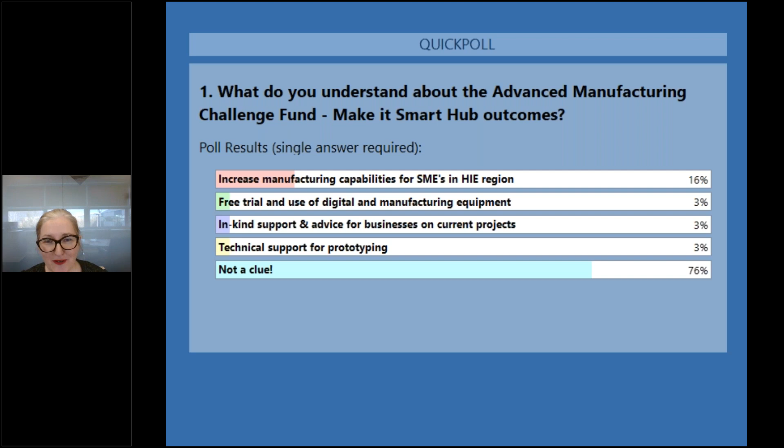Thank you, Sarah. Welcome all, and particularly welcome those joining us from the Highlands and Islands Architectural Association, who we've co-advertised this event with. This is the first time we've done a lunchtime webinar in conjunction with that partner, so hopefully you'll get something from this.

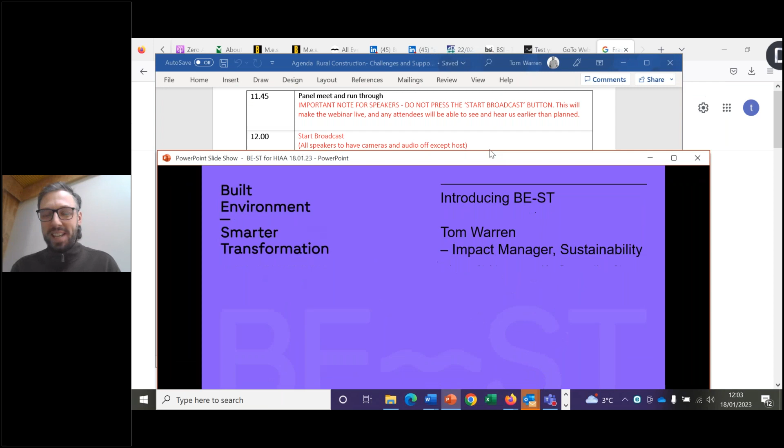I'm just going to share my screen. Sorry, I'm just having a slight problem with that. That's it coming up now for us. Thank you. Can you make it full screen please? Thank you. Got an able team of support in the background, so I appreciate that.

As Sarah said, I'm Tom Warren, I'm an impact manager. My remit within BEST is to work across the Highlands and Islands, so for those in that geography, if you haven't met me before, welcome. I'm going to give a bit of an overview of the context that Built Environment Smarter Transformation, or BEST, works in, and then some of the specifics around the Make It Smart Hub project.

Hopefully many of you are familiar with the scale of the construction ecosystem. These figures give an overview of what that looks like in Scotland, and within the Highlands and Islands, the last point there about 99% of businesses being SMEs is particularly pertinent, especially within some of the smaller architectural practices.

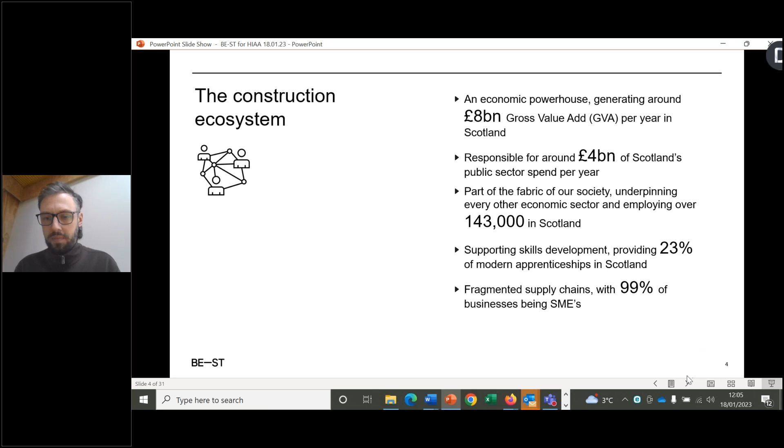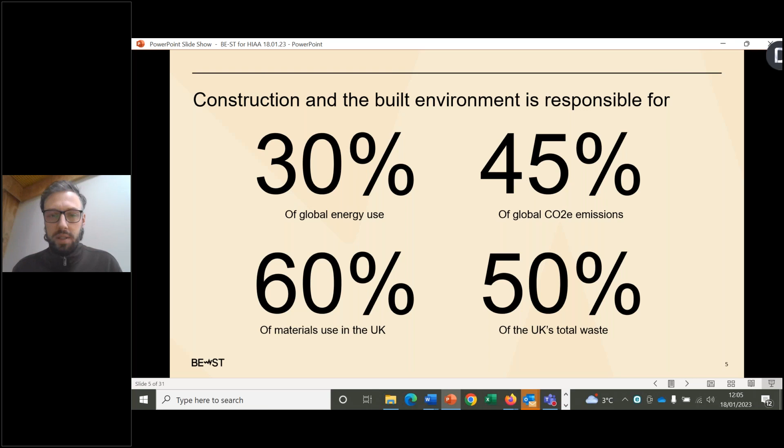Hopefully we're aware of some of the negative impacts that construction has on the environment around energy usage, material waste and CO2 emissions. So again, scene setting for the context we're working in. Hopefully you're also aware of the positive commitments made in Scotland around zero carbon by 2045, both domestic and non-domestic. Some of this will be touched on further in the retrofit parts of the presentation.

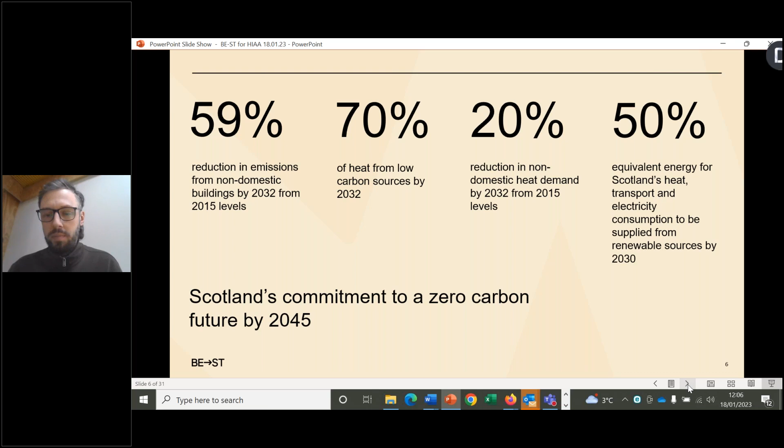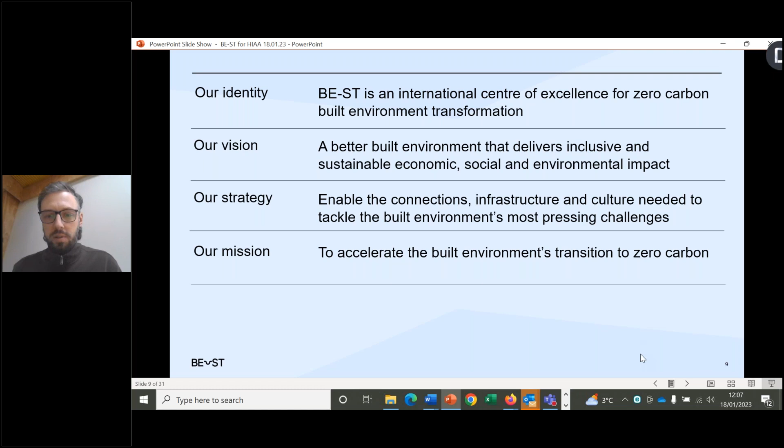These are our mission statements, and I think the key one here is the last, around accelerating the built environment's transition. Different organisations and stakeholders will be at different stages of that journey, so it's very much about picking up the conversation at whatever stage you're at and looking at the next steps.

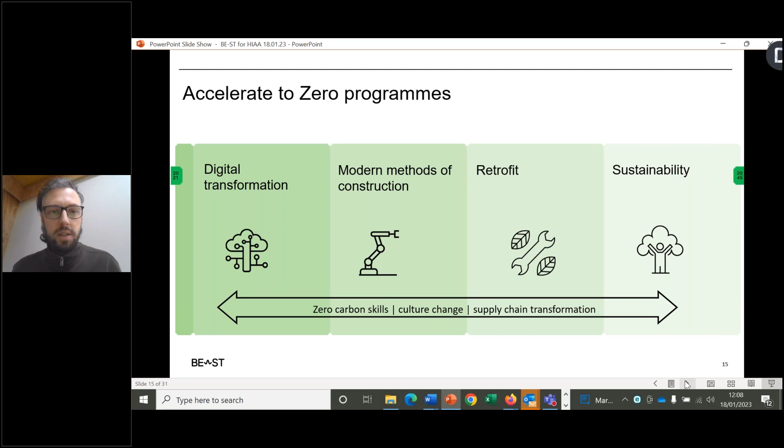This is made up of 4 different thematic areas. We're going to hear today from Sarah on retrofit and Sam on sustainability, but there are other elements as shown on screen there.

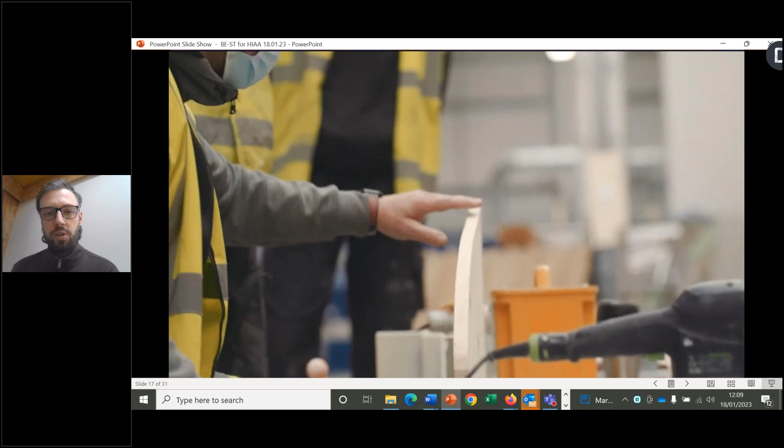There's a short video which gives an overview of the equipment in the factory. Quite a lot of what's on screen here is around mass timber construction, methods of construction around timber. The facilities are set up for tours and visits, so we would welcome anyone who's able to visit us in Blantyre to do so.

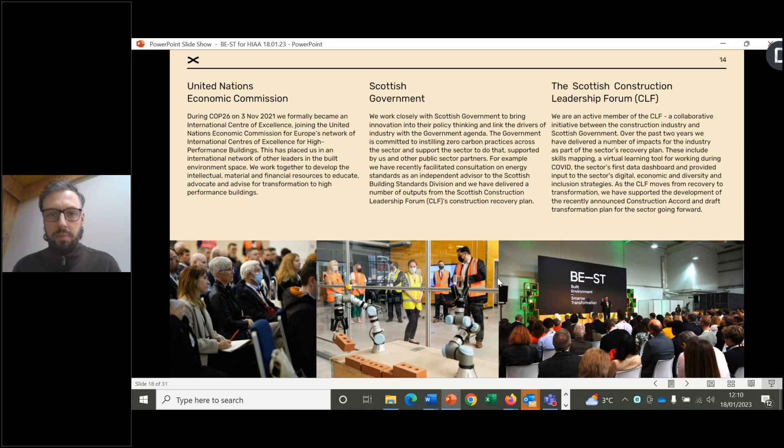We're one of 32 United Nations Centres of Excellence, which was awarded in '21. We work very closely with the Scottish Government across a number of different departments and sectors, particularly the Scottish Construction Leadership Forum. There's some information on screen there, and we can cover that in more detail later if needed.

We have a number of specific programmes to work with industry partners. We're very keen to hear from people for future rounds of Built Environment Change Makers and Innovation Champions. These are opportunities for individuals to become involved directly with us and to receive support.

Coming on to the Make It Smart Hub, which is the core focus of the project this webinar is looking at. This is a programme funded by Scottish Enterprise, working across the Highlands and Islands, and as it says on screen, aims to provide a one-stop shop for construction and manufacturing in the Highlands and Islands. This is being delivered in a number of different ways.

Just to give an overview of that project in terms of the funders and the scale of support, we're doing this in partnership with UHI in Inverness, and there's going to be some physical equipment - a 5-axis CNC machine and a virtual sawmill training simulator - available for SMEs to use in Inverness later this year, in this coming quarter. Make It Smart Hub also has a number of remote deployable pieces of digital equipment.

One example is the Leica BLK 360 scanner. That's a very small, very mobile 360 scanner that produces point cloud surveys. This is excellent for either existing buildings or monitoring progress on site, as the photo on the right shows.

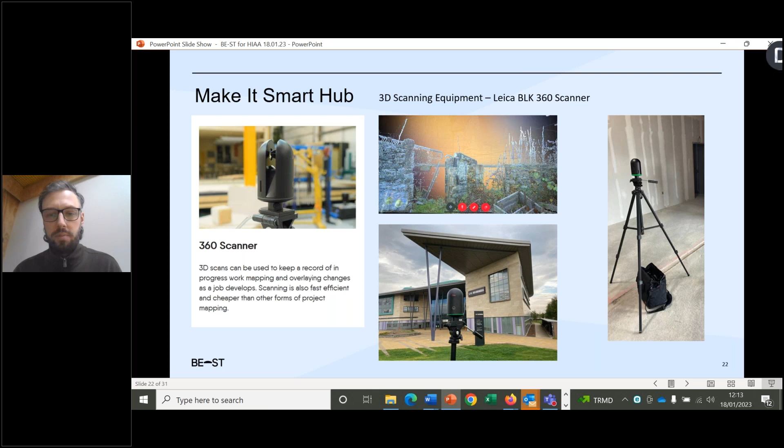Another piece of equipment, a different scale of support, is the heat flow meter. We have an excellent video available on the Make It Smart Hub portal and YouTube. Our colleague Sam, who we'll hear from later, demonstrates how the heat flow meter works, but in essence it's there to measure the thermal conductivity of materials, generally insulation products, or products in development. This allows companies to test materials at an early stage to get fast and accurate results on thermal performance.

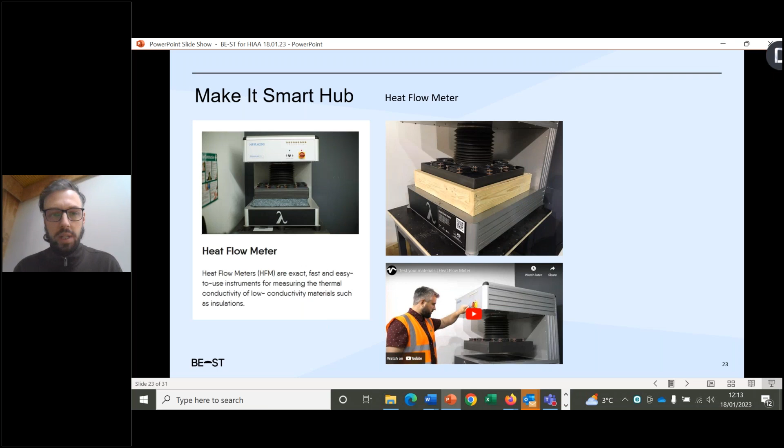Currently this equipment resides at BE-ST in Blantyre, but later in the year we're looking at opportunities to locate this within Inverness. We're going to touch on one particular support project we've been working on over the last year, with 7°22' Systems.

Just to give an overview of their product, this is an off-site manufacturing product that can be manhandled, doesn't require craneage, quite small scale components, as can be seen on the illustration there. They had a challenge around how to increase production and incorporate some elements of automation of these modules.

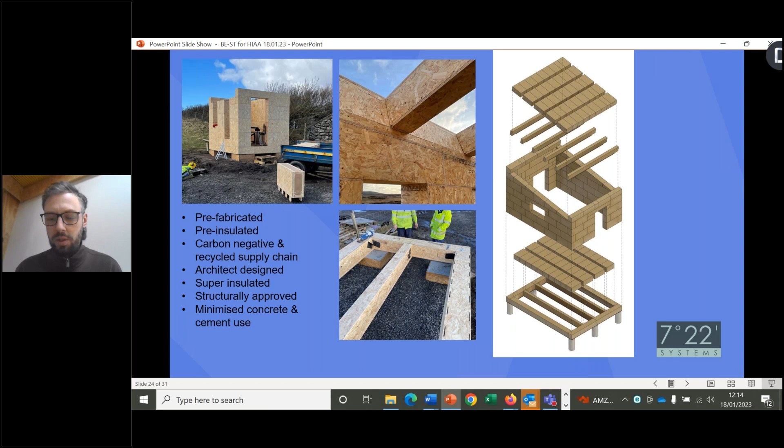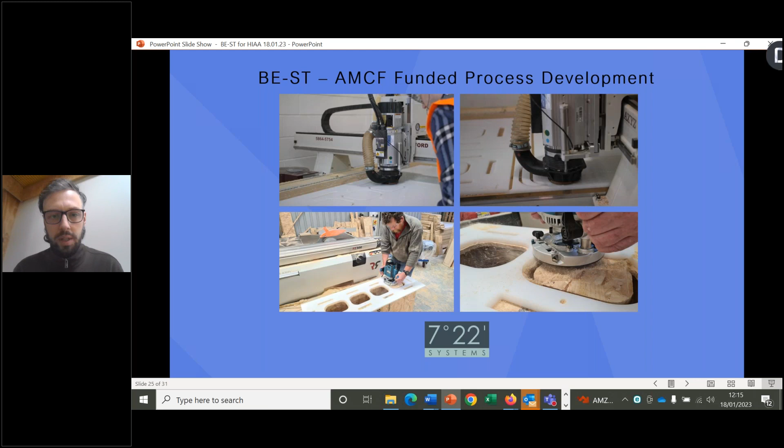So we worked with them to explore CNC production of jigs for use in their factory to cut the boxes and the different cutouts. On the top left are photos of the CNC equipment in our factory producing the jigs, and at the bottom, the jigs in use, which really speeded up production and accuracy.

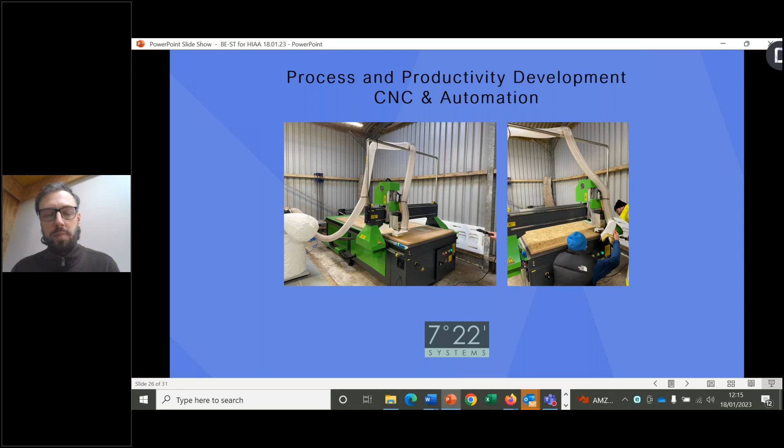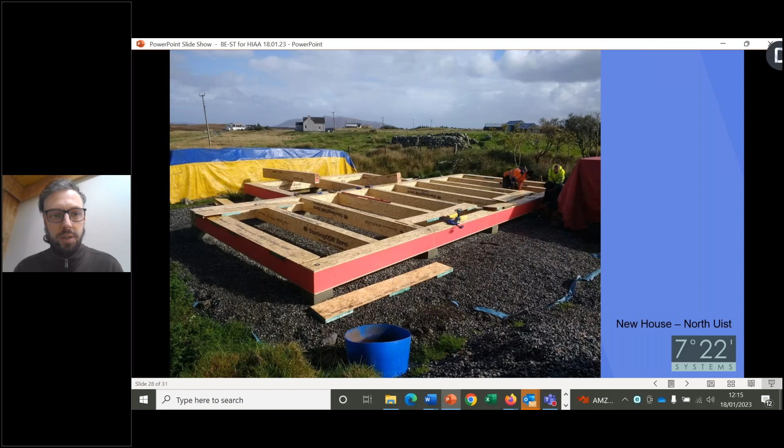Off the back of that support, and through their own development and investment, they've actually purchased their own CNC machine. This is in their facility in South Uist, where they can now automate part of the manufacturing process. Just to quickly go through some photos of what that product is then able to deliver in terms of off-site and modular construction.

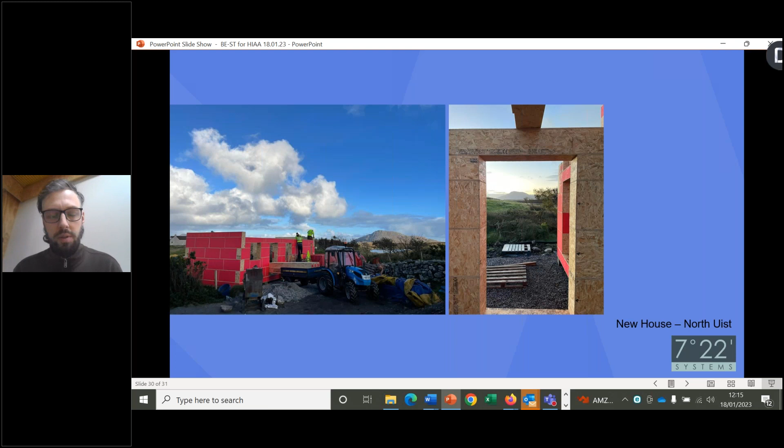From what they've explained, this build got the above-ground structure up in a day. So thank you for your time.

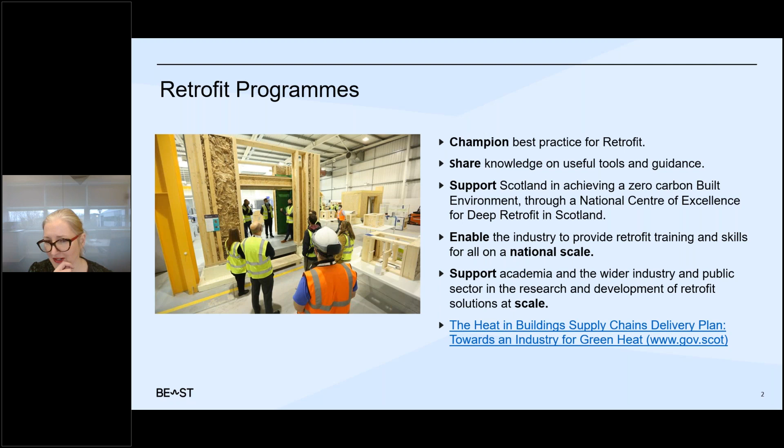We're also working with academics, trying to embed a lot of the new low carbon design techniques into curriculums. So I naively thought at the start of this presentation, when I reached out to a couple of architects, that perhaps the new build standard, which I want to touch on first, might not be well known in the industry. Because I'm trying to look at CPD and fit a lot in, there are a number of standards that already exist on the new build side in terms of net zero guidance and best practice.

These have all been ratified through RIAS, RIBA, CIBSE, working with the UK Green Building Council. So a good place to start before you think about retrofit in terms of CPD is having a look at all of these standards. Unfortunately I don't have time to go through them today, but you've got the Net Zero Public Sector Building Standard, which has been developed with Zero Waste Scotland and looks at circular economy principles. The RIBA 2030 and all of them take account of operational energy, which is what we need to think about in terms of reducing energy demand for retrofit.

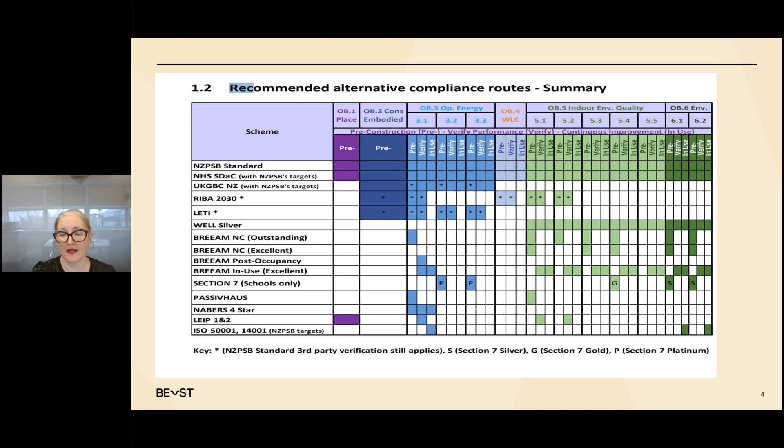I have lifted the heat in buildings targets, the ones that I think are relevant for retrofit. It's a hefty read. There's a number of documents on the public sector side that would be good if you want to understand where the financing is coming from, where the direction of travel is for the next 10 years. If you're speaking to clients and you really want to engage and influence, an understanding of the public sector context is a really good place to start. So things like the heat in buildings supply chain, the energy efficiency route map, and I'll send all of these on. You've got the heat in buildings strategy, the just transition and energy strategy, which has just been announced and I haven't had a chance to go through yet. But if any of these policies you want a deeper dive on, just get in touch.

By 2045, all homes and buildings in Scotland must have significantly reduced their energy use, and almost all buildings must be using a zero emissions heating system. That is tougher in a rural, traditional, historic context. We all know that. Hopefully some of the guidance that I referenced today will really help with that.

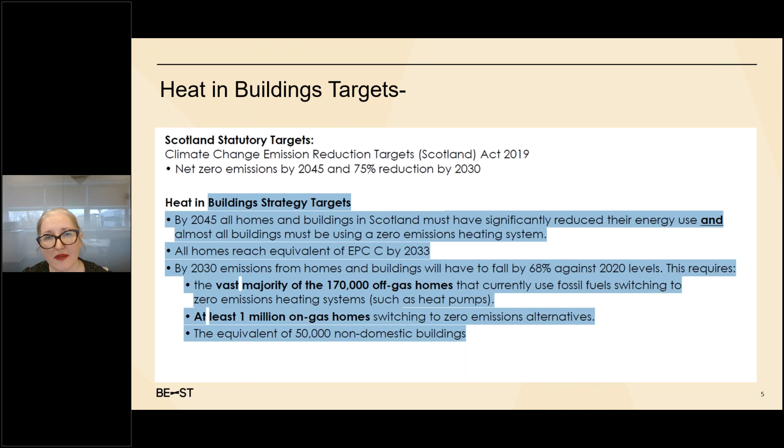We have all homes to reach equivalent by 2033. That is in the homeowner section as well. So there's a huge 70% of the homes that are currently out there at the moment on the domestic side are homeowners or private homeowners. It's how do we educate that section that these changes are coming. This is the direction of travel. And of course, we have to look at the electrification of heat.

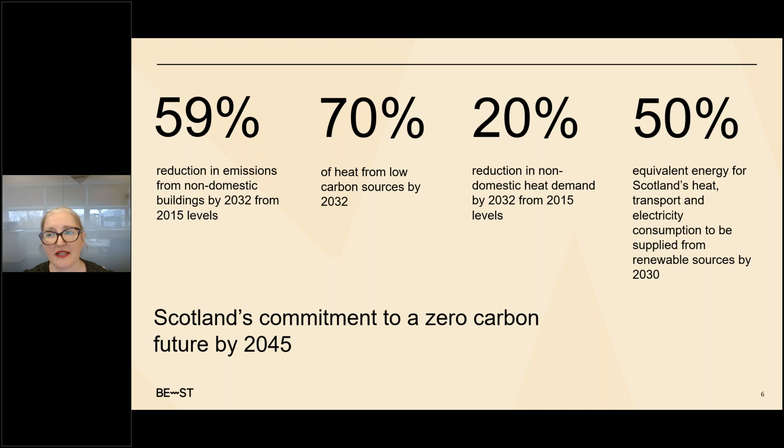Now this is a bit of a repeat slide from earlier. These are the non-domestic targets that we have to hit for the heat in buildings strategy. So whether you agree with the targets or think it's a challenge - somebody referenced it to me this week as trying to design an aeroplane before Heathrow is built, which I thought was a nice soundbite. So these are challenging targets. We've got a huge mammoth task ahead of us, but we're going to do it if we work together. It's about taking the supply chain, taking everybody on the journey together. And I really do believe that we can do it.

Energy efficiency has been going on in Scotland in the social housing sector for decades. In 2014, through the energy efficiency route map, detailed here, the EESSH1 compliance and the EESSH2 consultation is currently out. They've been working to energy efficiency targets for almost a decade. So if you want to look at really good examples of domestic retrofit, I would look to the social housing sector. There's a number of passive house schemes, EnerPHit passive house schemes, and there's a number of EnerPHit schemes currently being undertaken. There's private rented sector legislation to bring the private rented sector up to speed with the social housing sector on the domestic side. And there are a number of legislation changes that will be introduced in the next 4 or 5 years.

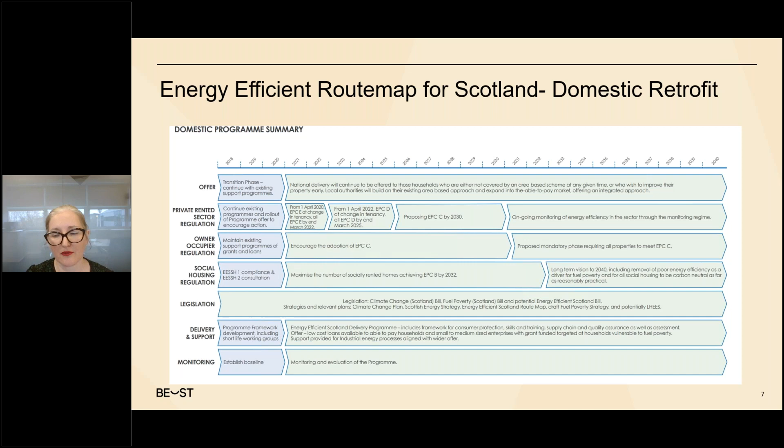So this is just to give you the context of why everyone's talking about retrofit. There are massive changes coming, particularly when we look at the scale of what needs to be delivered. So how are we going to do that? By a whole systems approach. And I wanted to mention the LHEES documents - these are the local heat and energy efficiency strategies, which all local authorities in Scotland are mandated to deliver by December this year.

We're going to be seeing a lot of adverts for LHEES officers, I think, and there's also a number already in place. There is a Scottish Government contact who can give you a list of the officers.

This is where local authorities will have to lead on developing the whole systems strategy. There was a number of pilots conducted. Highland Council and Shetland Council were involved in those pilots, so their LHEES are further ahead.

This is the long-term plan for decarbonising heat. So where are the opportunities, for example, for district heat systems? That is tougher in a rural context - the business case doesn't quite stack up.

It will also provide a zoning strategy within the local authority. So if you're an architect, designer, installer, and you're looking to find out where the potential zones are and what needs to feed into that, start with your LHEES, get in touch with your local authority.

You may or may not know that all large companies have to, and have done for the last 10 years, report their carbon emissions and carbon reduction strategy through SECR reporting, Streamlined Energy and Carbon Reporting, and the ESOS schemes, the Energy Savings Opportunity Schemes. Public sector bodies all have to already report their carbon emissions and their reduction strategies.

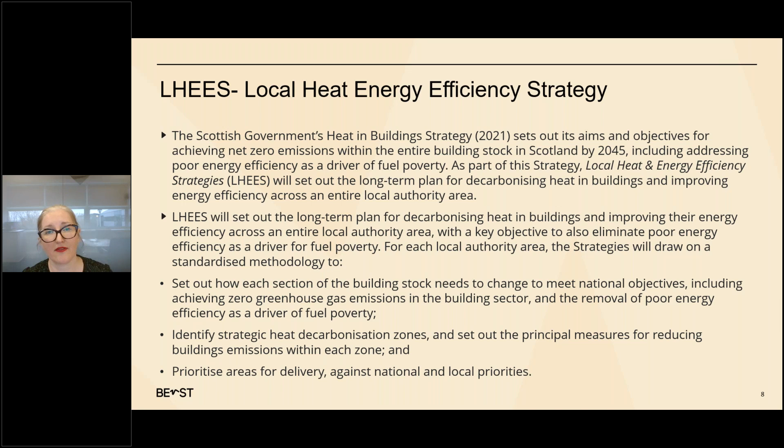All of those strategies, and social housing and the owner-occupied sector, will then feed into this strategy review that the councils are going to be undertaking. That will then feed into the huge amounts of data that we'll need to have a data strategy around how we share all that information.

And then the strategic zoning and pathways - so where is the low-hanging fruit, where are they going to start. So my advice, if you want to find out what's happening in your local area, is find out what's happening with your LHEES plans.

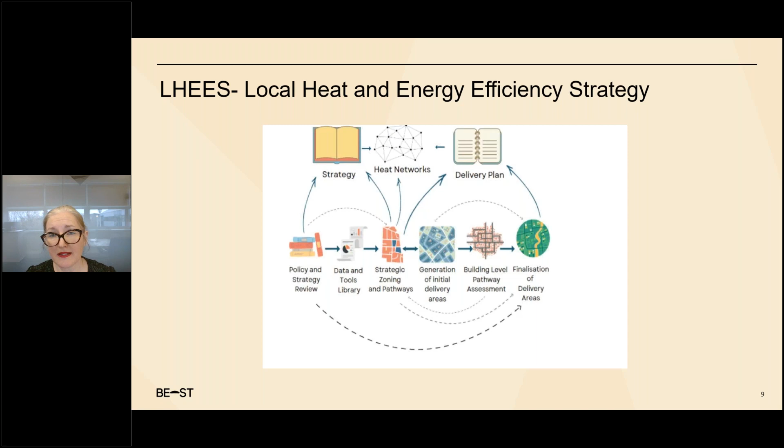In terms of retrofit guidance, just as there are a number of new build standards to consider, there are also a number of retrofit standards. The LETI Climate Emergency Retrofit Guide was released, I think, in 2017. The good thing about LETI is it's been developed with industry.

Designers, architects, specifiers have all come together and created this climate emergency retrofit guide. It covers various building typologies - domestic, non-domestic, commercial and retail. If you haven't had a look at that, it's a really great place to start.

The EnerPHit standard is on the domestic side, and it is the retrofit version of Passive House. It's a low carbon design standard, a fabric first approach, taking into account thermal insulation, ventilation strategies, thermal modelling, thermal bridging - all of the good stuff that you assumed was getting taught at university, which you find out when you get into industry.

It's a step-by-step retrofit process, a whole house approach. We're moving away from single measures - it's not just about doing the windows, just doing the insulation. It's about understanding how all of those elements work together.

With a budget in mind, the EnerPHit standard uses PHPP modelling, the Passive House software modelling used within the Passive House standard. There needs to be a kind of upskilling within design practices, as modelling is going to be more and more a part of what everyone needs to know about in terms of energy demand reduction. The AECB retrofit standard is from the Association for Environment Conscious Building.

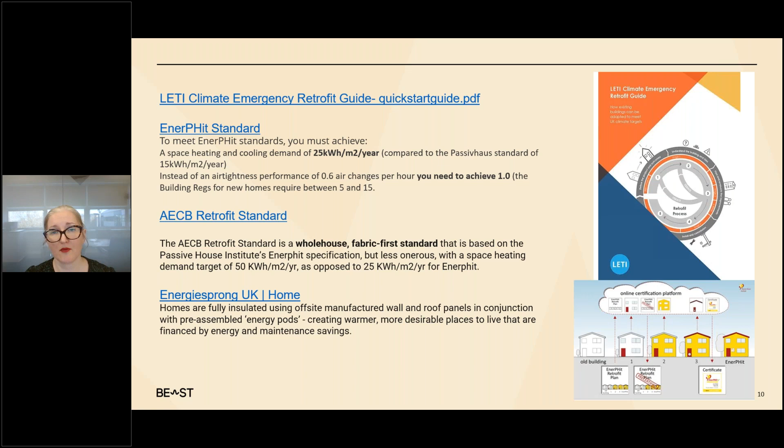If you're spending a lot of money on a large-scale domestic retrofit project, taking an EPC from E, F, G up to A or B, there's a cost to that. It's about introducing an energy charge, if you like, to the resident. I can also do a deeper dive into Energiesprong. It's only been used in the social housing market at the moment, however, once the supply chain's in place in Scotland, that's a model that could become more popular.

The key principles of EnerPHit are improved thermal insulation, reduction of thermal bridges, thinking about heat loss and wall detailing, any junction detailing, considerably improved air tightness, the use of high quality windows, and your ventilation strategy.

As we know, in traditional buildings there are material considerations, location considerations, and sometimes they've been built before building standards existed. So how do we model that building to fully understand how the building physics operates, and ensure the interventions we make don't cause unintended consequences, thinking about moisture, condensation risk, open vapour barriers - all of these things you need to consider in traditional historic buildings.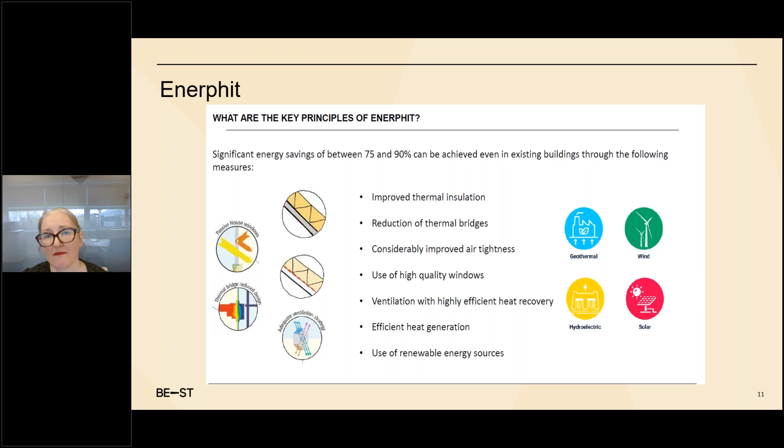I lifted this from our Sensifiers webinar that we did, which is an EnerPHit school done in East Ayrshire. I couldn't find any examples of commercial buildings in a rural context, but I will keep looking and reach out to my network. If you want to watch the Sensifiers webinar, there's some really interesting information on detailing.

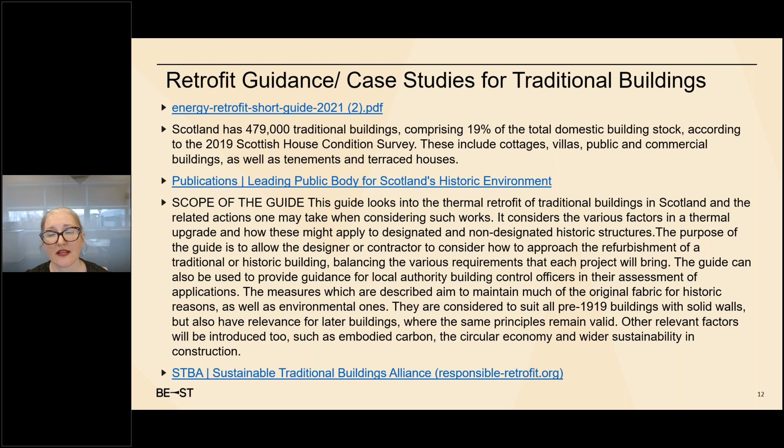When thinking about retrofit guidance for traditional buildings, which make up a large percentage in a rural context, Historic Environment Scotland is second to none. They've done a lot of research and technical guidance, all available on their website - I've detailed a couple here. There are 9 current case studies for retrofit projects, so I'd definitely recommend you access that for further CPD. The Sustainable Traditional Buildings Alliance also has case studies for rural considerations - it's a really good resource.

We can't have a retrofit CPD session without mentioning PAS 2035. It's the specification for proper assessment of dwellings and the design and implementation of retrofits for domestic dwellings. It sets out a step-by-step retrofit pathway, based on risk assessment pathways A, B or C - small, medium, large if you like. There are 6 different roles within PAS 2035, and there's a real opportunity here for designers in Scotland to get ahead of the game.

All public funding for retrofit, particularly in fuel poverty, mandates PAS 2035 as the standard they want domestic projects to follow. We don't have a lot of it in Scotland yet, so there's a real opportunity here for designers to get ahead of this and become PAS 2035 ready.

It monitors and evaluates the project from beginning to end. It's tenant focused, and it's about assessing every measure. Again, it uses or recommends PHPP modelling and provides feedback throughout the whole process.

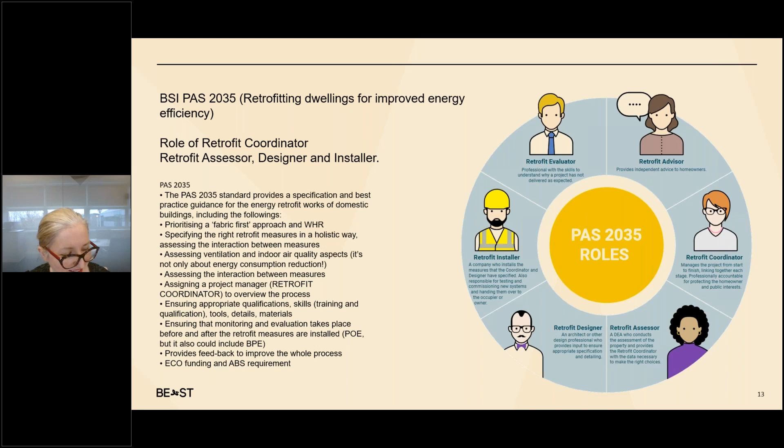PAS 2035 is coming, so it's really important if you're working in the retrofit sector, on retrofit projects, that you educate yourselves and hopefully get trained up. We've done PAS 2035 training at BEST, and we've got modules online so you can access those.

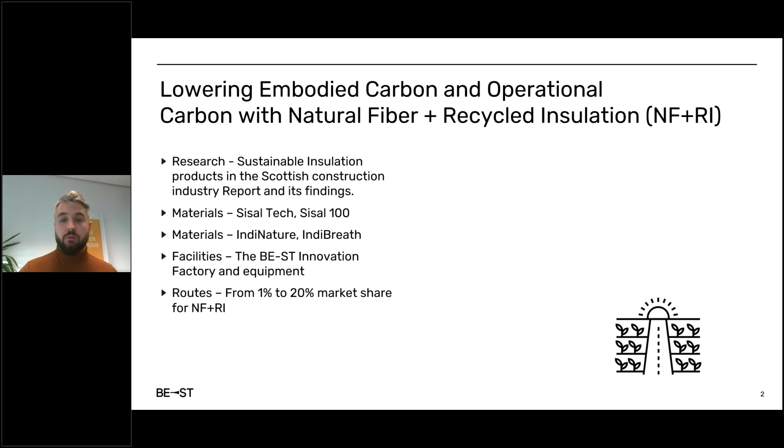So here's the research I've been talking about. It's a piece of desktop research funded by Zero Waste Scotland and Built Environment Smart Transformation, delivered by University of Edinburgh, specifically Julio Bros Williamson. The idea is to pull together all the knowledge that is out there, but with a Scotland focus, pulling the Scottish lens over what the supply chain looks like, and what the opportunities are for Scotland and Scottish projects. Some of the key challenges we identified is knowledge, and the default for specifiers to go to what they know best.

Natural fibre products account for about 1% of the UK market share at the moment, and that other 99%, a handful of companies, are very well established with a lot of handy U-value calculators, technical support teams, PDFs, and a huge array of support to evidence how their products can benefit your project. But a lot of the natural fibre and circular insulation products are coming from a new start. They're not as well developed, so gaining that knowledge, having that understanding, and being able to challenge the status quo is part of that challenge going forward.

But then also pounds versus carbon, and at what cost. So as we looked at whole carbon life cycle assessments, how do we move that shift to fabric first principles? Traditionally, insulation has been a product that you don't see, that can get value engineered, subtracted for something else, because a lot of people just see it as a U value - is it going to do the thing that I needed it to do? The justification there is that over the course of a building's life cycle, no matter how high embodied carbon the product is, it'll recoup more than that embodies. But as we look at the carbon going into buildings, that'll become more under scrutiny.

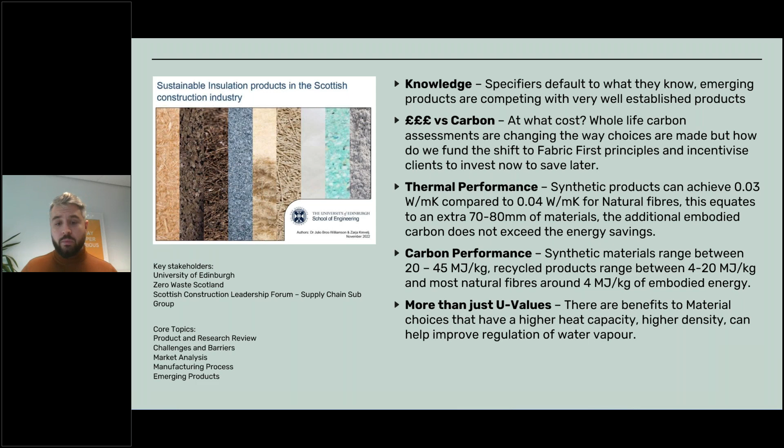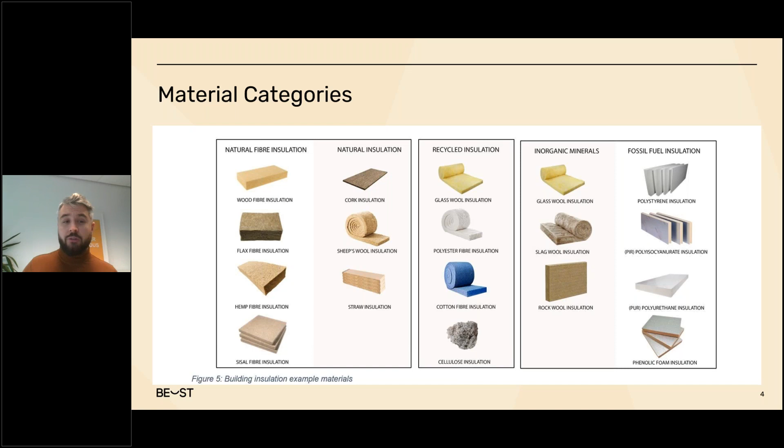Looking at some of the material categories we've been looking at: there's natural fiber insulation that includes wood fiber, flax, hemp, sisal. Natural insulation products like cork or sheep's wool or straw that aren't necessarily fiber based. There's recycled products, which include things like glass wool and polyester from bottles, cotton fiber from textiles and fashion, and cellulose from newsprint and magazines. But then you're into the more familiar inorganic minerals—glass wools, slag, rock wool—and into the fossil fuel derived polystyrenes, PIRs, PURs, and phenolic boards. Broadly, this is a kind of categorization of natural versus inorganic that we've been using.

To assess all of these, we're looking at the global warming potential, taking data from life cycle analysis and environmental product declaration forms to compare and contrast. There's a fantastic website that puts these into a pyramid of carbon. You can see that PIR foam board is 25 kilograms of CO2 equivalent for a global warming potential for a functional unit of a meter squared.

As we come down through that list, you see more of the recycled products. And as you get into that green area where we're actually sequestering carbon and locking carbon in, you're getting into that natural fiber sector.

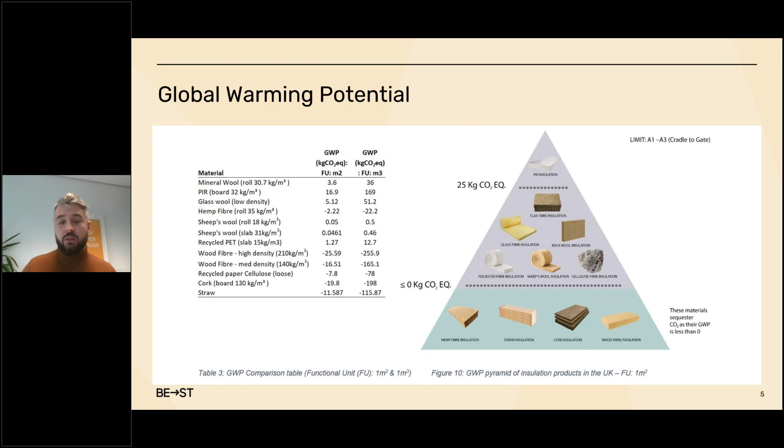So again, synthetic versus natural—it's not an easy switch. As I mentioned earlier, looking at the wall thicknesses and the challenges to detailing: just purely on wall thickness alone, if you're moving from a wall build-up of mineral wool and PIR on an internal insulation to achieve a 0.15 U value for your wall buildup, you're looking to add about 80 mil to go to purely hemp-based insulation.

So how is that shifting the property? Are you increasing your footprint of the foundation to maintain internal wall dimensions, or are you losing a bit of internal wall space when we already have quite small wall space standards in the UK? These challenges are things that are going to be a dialogue between designers, clients, and contractors to maintain the balance. But also, as we look at wall buildups, how are we protecting for fire?

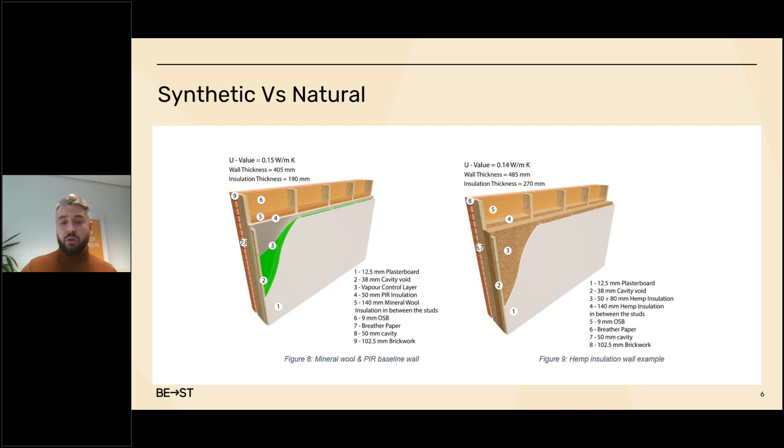As most of you will be aware, natural products do burn. The advantage of rock wool and glass wool is that it melts at over 1,000 degrees to be produced—that's why it's so carbon intense in its production process. But to benefit from that fire performance, we need to sacrifice or add layers to further protect the material. Natural fiber tends to be E-rated, so it will ignite and does add smoke. But it's how we use them and how we detail them to increase the use of these products.

Again, just looking at some of the recycled content of material there—things like the polyester fiber from Thermafleece, that is around 95% recycled content, because it's taking excess bedding, pillows, duvets, and mattresses, and taking that material and putting it back into a new product.

But when you're looking at natural fiber, you have to think of all the products that go into the manufacturing process, especially with woven batt, because even though we'll be using, say, a wood fiber batt, we'll be using a polyester content to melt and hold those wood fibers together. So typically between 5 and 20% polyester content, even for things that look like wood fiber, unless you're going for a wet process rigid board.

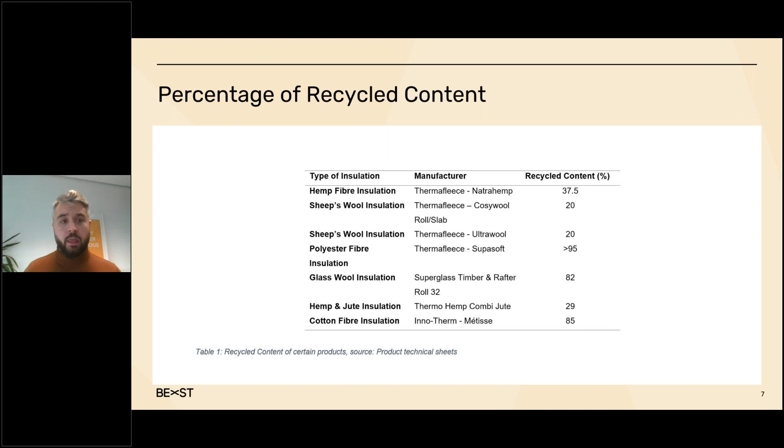Part of the work we're looking at is how we map the challenges and barriers. I'm aware that in the central belt in Scotland, we're on the periphery of a typically Southeast and EU-based production supply chain for insulation, and that's exacerbated further up in the Highlands and Islands. With such lightweight volumetric products, how do we reduce the risk and the road miles?

Things like EPS don't travel well in terms of getting damaged before arriving at site, but also a lorry load of wood fibre from France can cost up to 40% of its cost purely in transport. So how can we reduce the road miles to reduce costs and allow products to enter the market at a lower rate? Products like EPS, which typically come from Eastern Europe, can cost £4,000 per load just to get across the channel. A lot of the cost of insulation is in transport, so how can we use Scottish-based manufacturers to reduce that?

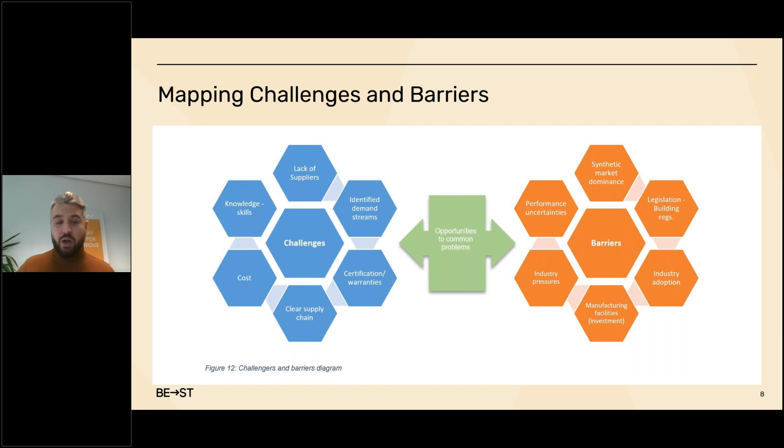Which brings me on quite nicely to companies like Sisal Tech, an Edinburgh-based company looking at the use of sisal and circular waste textiles, including Harris Tweed and other wools from the Scottish textile industry, to make a natural-based product.

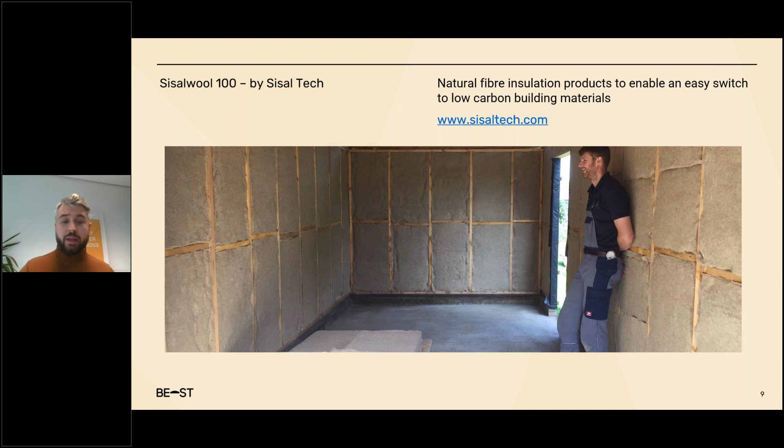At the moment, Sisalwool 100 isn't BBA certificated, but they're working through a process to increase their production supply and gain those certifications. In contrast, IndiNature with their IndiTherm products do have a manufacturing facility up and running in the Borders in Jedburgh, and are going through their BBA certification process at the moment. I believe Sam and Scott are hopeful that certification will be completed within the next few months, and they're producing product already.

So we're working with them on what we hope to be a CPD series and some further training, so keep an eye out for that, and hopefully we'll be able to supply material from our first natural fibre insulation product in Scotland for your project soon.

If, on the other hand, you're looking to make your own and look at other waste streams you'd like to work with, we have our pilot insulation line in the factory. This is a piece of equipment that can try different material recipes and lengths, so we can test thermal resistance, fire performance, moisture performance, and see if there's a new product we can take to market.

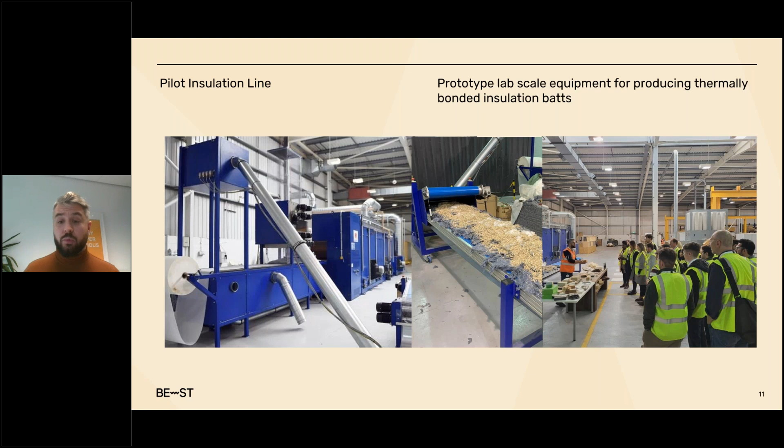We also have some equipment in the factory for blown fibre testing and density testing, where we're looking to fill panels for off-site construction and test the settlement to reduce heat loss at the head of that panel.

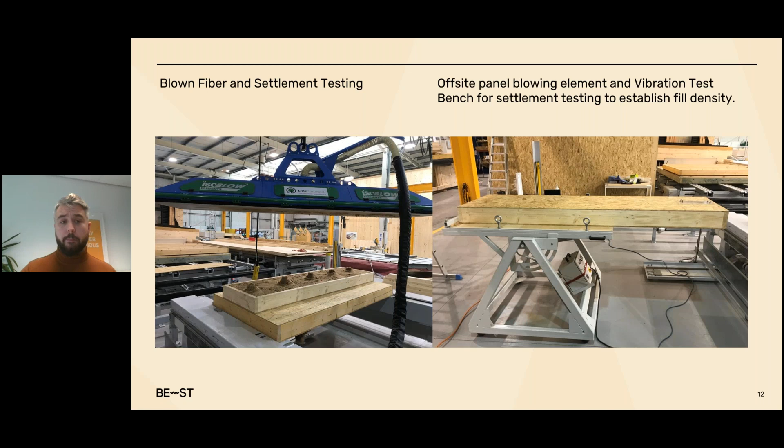So just to summarise, routes for increased natural fibre and recycled insulation use. Really, part of it is just demand-based. As I say, we're starting from a low level of 1% market share, and the development of demand. Architects and specifiers are probably the ones most eager to address this, but we need to see the policy that follows.

We look at what the French have done with their 50% natural products requirement in public buildings. That's really accelerated their transition to wood fibre use, taking their domestic market share to about 12-13% for wood fibre-based products. Things like the Net Zero Public Buildings Standard are currently optional, but we'll see that become more and more of a required standard, with embodied carbon targets getting wrapped into building regs over the next few years.

That's a journey that I think a lot of people recognize is happening, and it's now a case of how we get there and have a just transition towards those new areas. As Sarah touched on, skills and training, having skilled installers for the new products, having that familiarity with a new material type, so you can install it well and appropriately with no gaps or heat loss.

And for all of you, just care and attention, check the environmental product declaration form. Just because you've specified a wood fibre product doesn't mean it's all created equally. It might be made in the UK, it might be made in France, it might be shipped from around the world. So understanding that most products declare their carbon based on cradle to gate, understanding where in the world that gate is and how far it is to your site, and your use of that product or your wastage, can have a huge impact on the levels of emissions from the use of insulation.

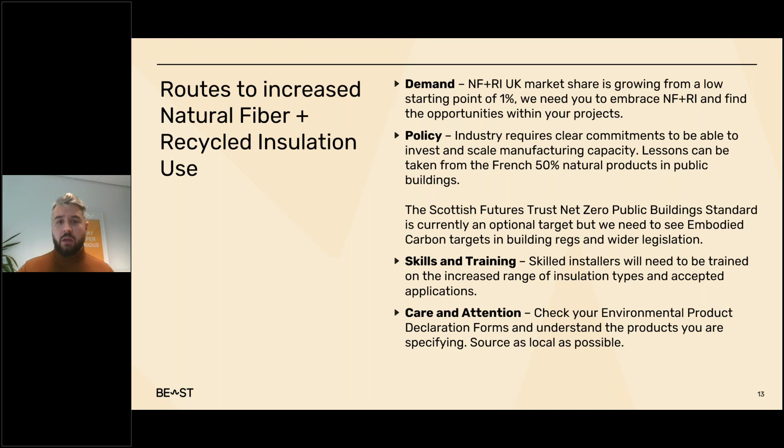I'm sure there's a lot more questions there, and I'll hand back to the team and we'll open up the Q&A. Thank you.